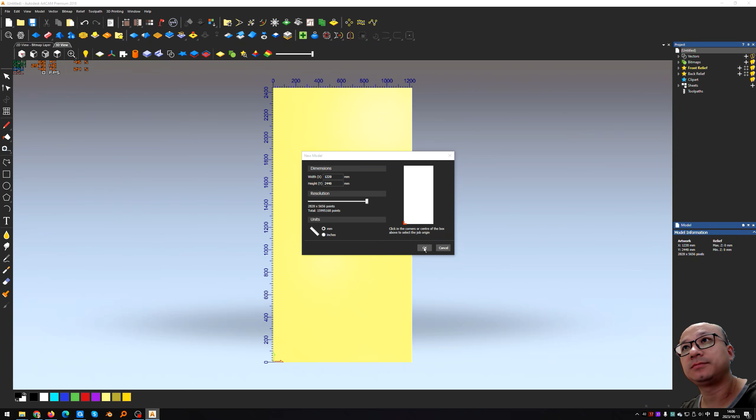Create a new model. Make the size the same as your CNC router. Relief, import 3D model, and choose the 3D model we made. Make it to center.

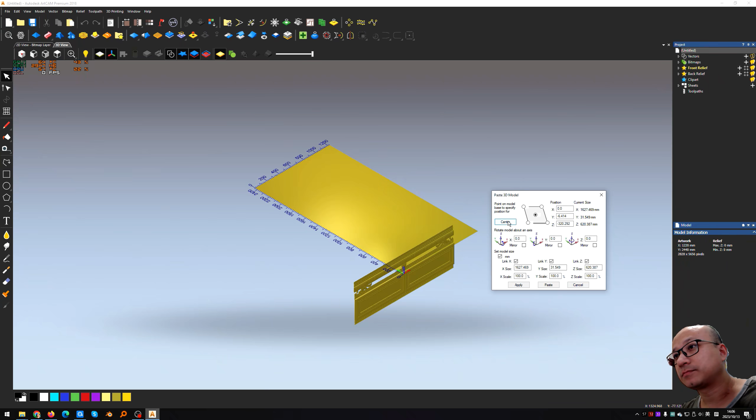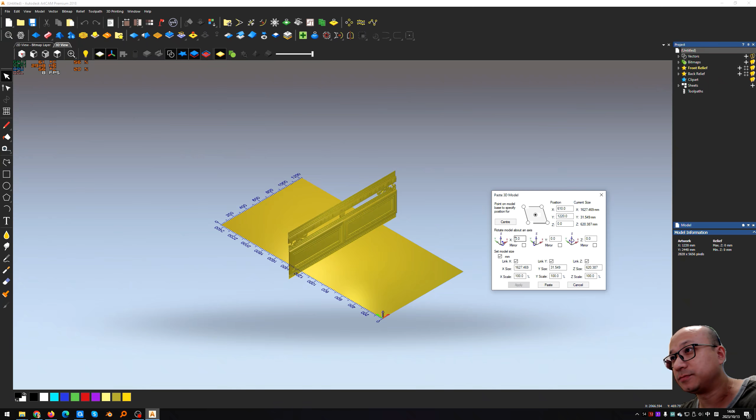And we need to rotate this relief and make this side upward. So we'll try this. The x-axis will make it rotate minus 90 degrees. Apply.

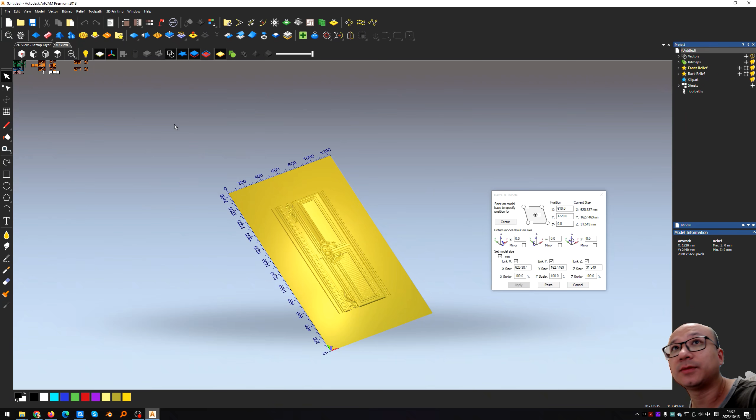And z-axis 90 degrees. Apply. And we press the center button again. Okay, and then we can position it at the bottom left corner if you want. So we make it 0 and 0, apply.

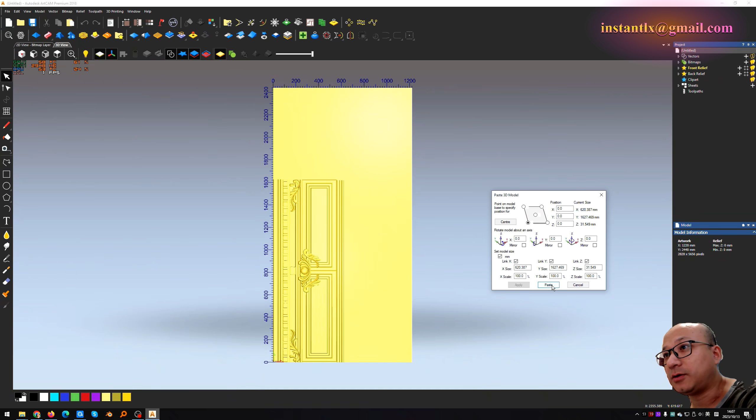We press paste and cancel. So we get this relief imported into ArtCAM. Now we'll make toolpaths. Click toolpaths. In the 3D toolpaths, the first one, create machine relief toolpath.

We'll use automatic rendering, so ArtCAM will find the boundary of this relief automatically. We choose finishing tool, we use this ball nose.

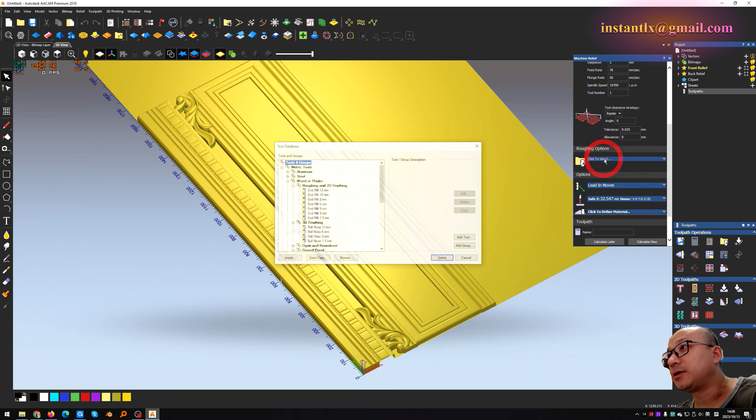And we set the step down to 5 mm. Also, we should use a roughing tool. We'll make it this 6 mm. Select, and we also make the step down to 5 mm.

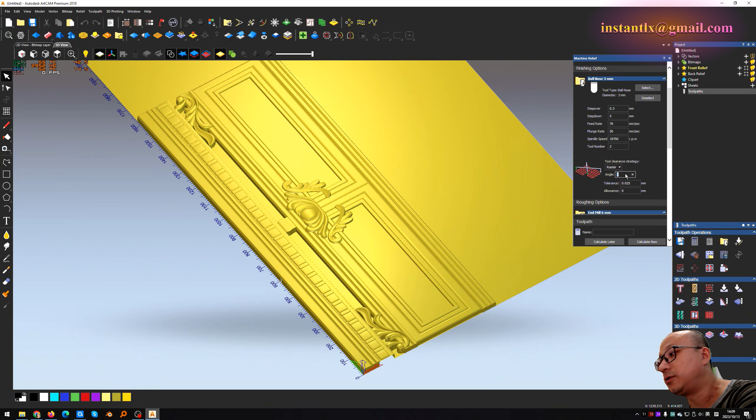And we can set the number here to 2 if you have an ATC machine. ATC stands for auto tool changing. Okay, and for the finishing tool, we shall make the angle 30 degrees, for example. Okay.

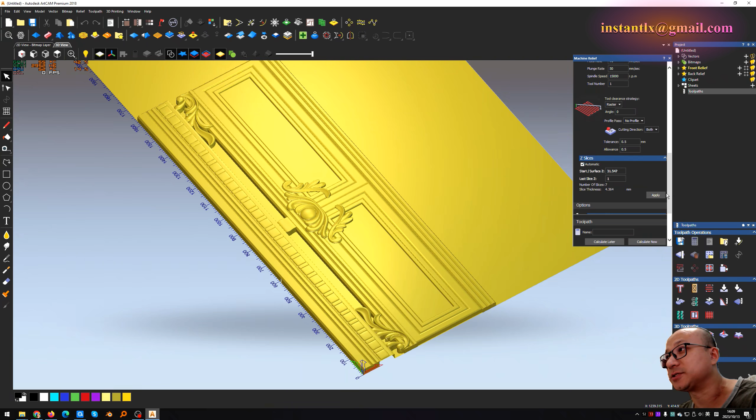So here it shows that there will be 7 slices for this thickness. Okay. We calculate now.

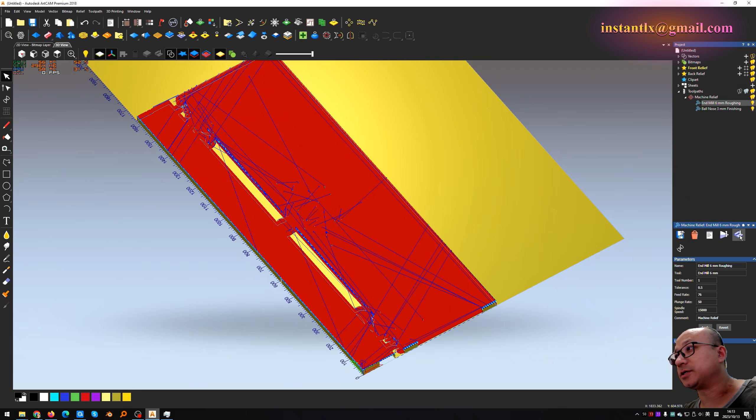Then we make a simulation. So here is the roughing toolpath simulated.

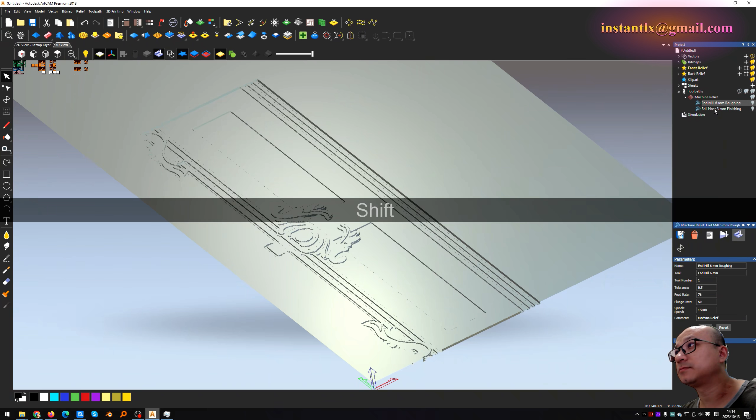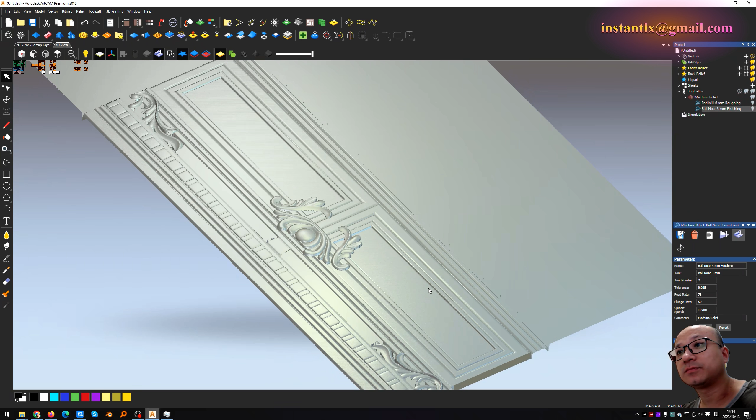And here is what we'll get at last. Some part will be cut off. Okay.

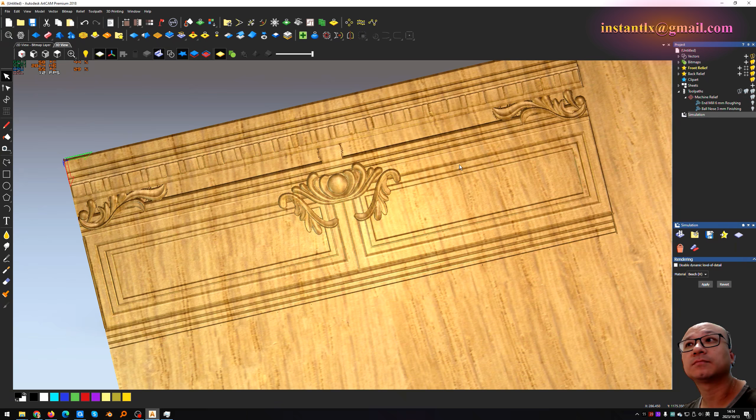Now we can save the toolpaths. And recheck the order and the tool number before you save it. And we can use the built-in post-processor and save it.